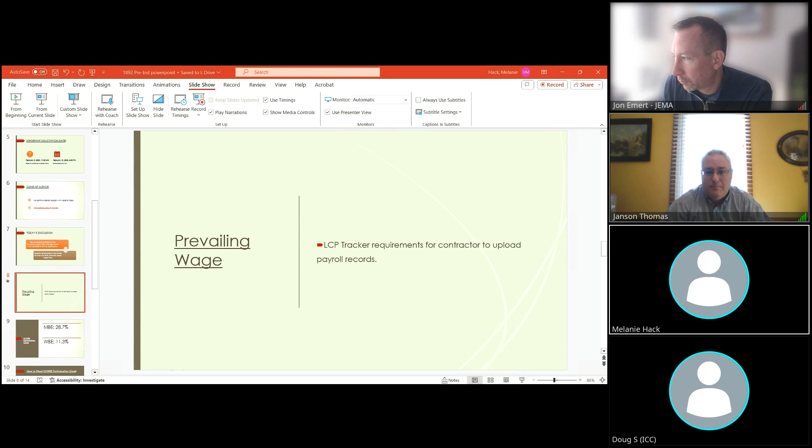Hi, my name is Trinia Russell. I am a contract compliance officer with the St. Louis County MWBE office, and we will be talking about the pre-bid process for the MWBE office. The goal set on this project for MBE is 28.7%, and for WBE is 11.2%. As we discuss the pre-bid process, some of the things I want to point out that are very important is how to meet proper MWBE participation for the project, which ranges from engaging significant numbers of certified MWBEs to making a good faith effort.

So the first thing you want to make sure when you're submitting a bid is that all the contractors, whether they're certified or not, including lower tiers and subcontractors, are listed on the utilization plan. That is the first and most important step. The second step is when you get to the NOIs, notice of intent to hire, make sure they're all included, whether they're certified or not, and signed by the subcontractor. That is very important.

Another thing to keep in mind, here at St. Louis County we use B2G. Just like Janson mentioned he used LCP Tracker at the county, we use B2G. Another thing I really want to emphasize is the NAICS code. The NAICS code must match the type of work submitted on the notice of intent as well as the utilization plan. If it's a certified firm, that firm must be certified with those NAICS codes to be counted for participation. That is also very important.

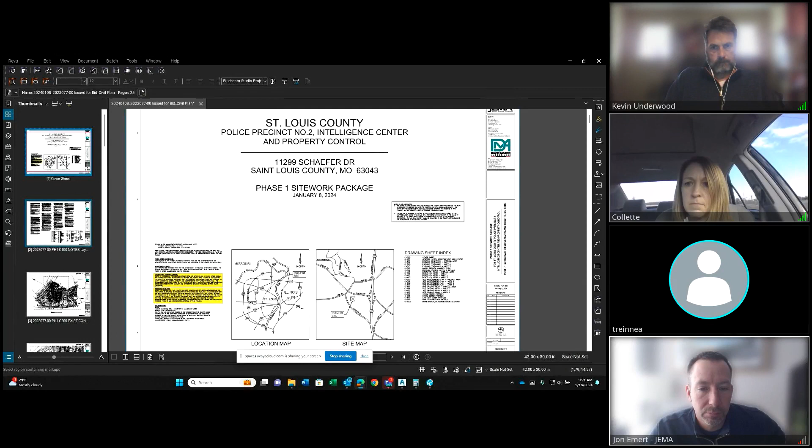So I think we'll hit the high level of what this current scope is for the phase 1 site work by going through the drawings. Can you see my screen all right? Yep, okay.

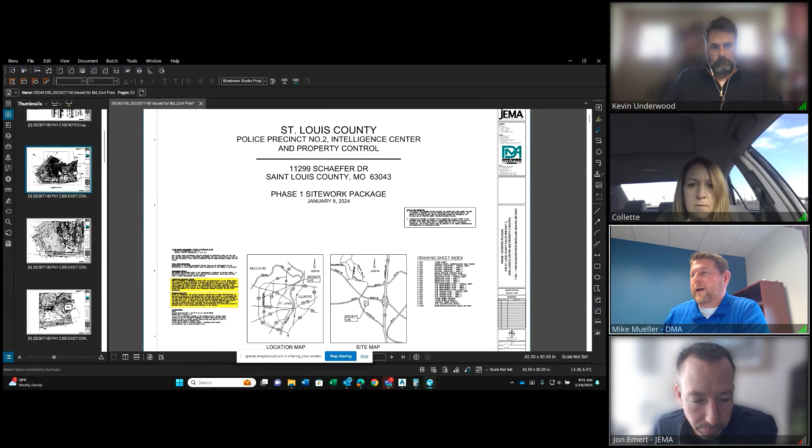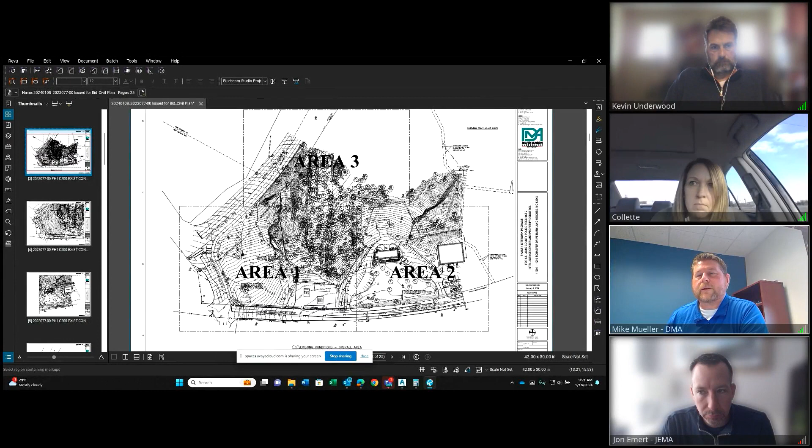Some of the highlights we wanted to point out on the set of plans is, as Colette mentioned, it is a heavily wooded area back here where we're going to be doing a lot of our work. Part of it's in a nice grass area, but there's a lot of tree demolition that's going to have to happen before we can move forward. Some other items back here, which is kind of hard to see on this drawing, I can go to a blow-up drawing in our demo package - there's some storm structures back here as well that are going to need to be removed.

So we got some channels that we're going to be grading out, some storm structures completely being removed, another one here to its endpoint, another one that goes up to the previous drawings. Our limits, we're getting pretty close to Dorsett, aka Schaefer.

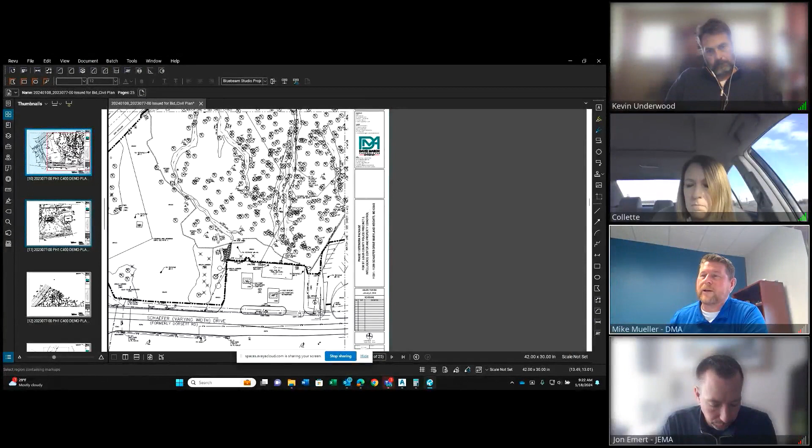We're avoiding the county fueling station altogether. The building next door is the county construction offices. Again, we're avoiding their parking lots. We're skirting their fence here, but our sanitary line does go through that back part of that property.

So there's not as many trees, but anything within our path, obviously we're going to have to clear out. Not huge, but there's a couple stumps just beyond the fence that we're going to go ahead and take out for them as well.

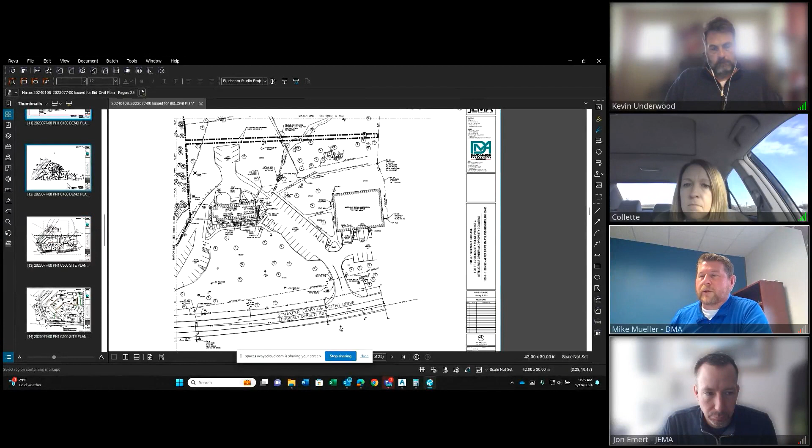Getting into the site design overall, generally the building is facing Schaefer, will be facing Schaefer. So we're going to be grading and installing storm sewers all around the building for future parking. Basin sits to plan north here, and then that sanitary line runs this way here.

Colette had mentioned that some of the structures fall within the future fill. When we get to the grading plan, you'll see a nice huge slope going down towards the building.

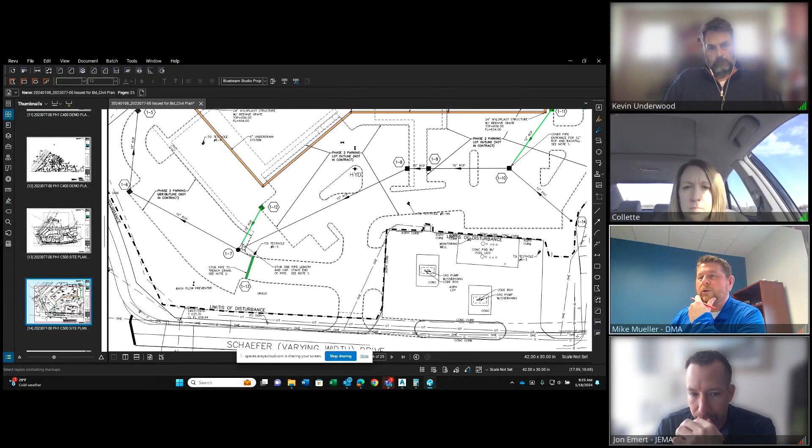So this particular storm run, we have a note to call it to stub out one pipe length and then cap it, stake it so you can find it when you come back after the building has been backfilled. We're also going to hold off on putting any trench drains in because that will just be a huge speed bump during the construction of the building. We don't want those to get destroyed, so they'll have to come back and finish those.

So we'll stub the pipe over to it, but we won't install that one. Additionally, from structure 1-10 to 1-11, you'll have to come back and finish that one after the backfill for the building. And then this entire run was also in the backfill. So these three trench drains will also be done at a later date after the site's been brought up to fill.

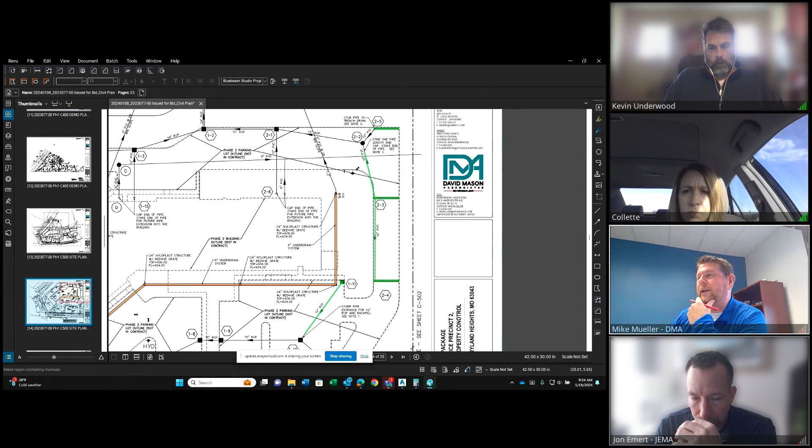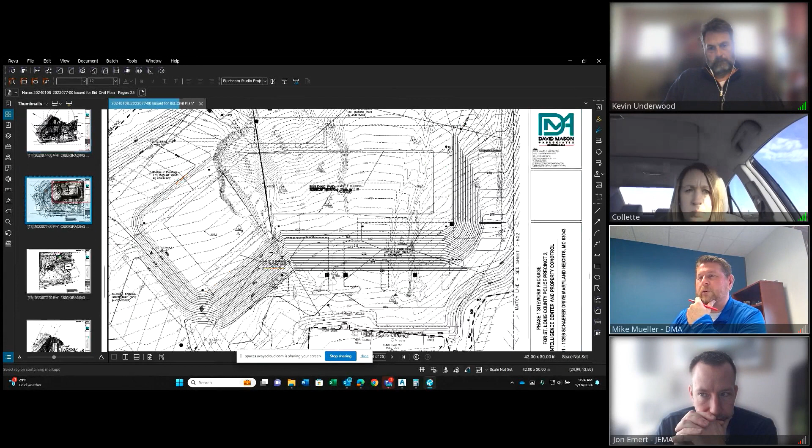I also wanted to highlight the under drain system. I'm going to switch over to the grading plan here. So you can see this huge slope we've got coming down on three sides. It's really directing the whole site runoff from Schaefer towards Dorset. So we think there's going to be a big problem with stormwater during construction.

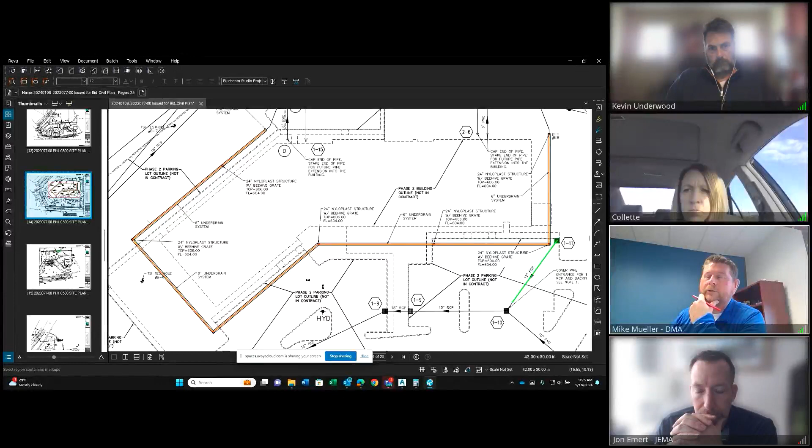So we are going to be installing a 6-inch under drain system on three sides that's highlighted in orange here on my screen. And we're also going to be putting in these Nyloplast structures, 24 inches with a beehive grate to help with the stormwater as well during construction. The phase 2 contractor will be responsible for capping those Nyloplast, but for your construction, we're going to put a beehive grate so we can control the stormwater around the building pad itself.

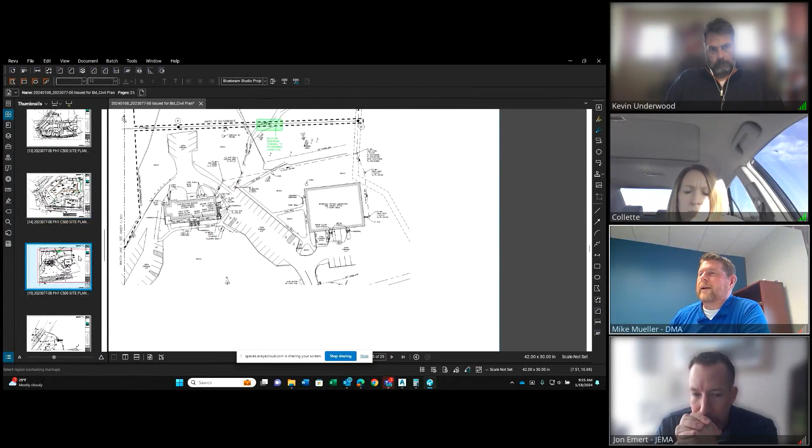So I just want to make sure that was highlighted. On the sanitary line, we're going to address this in an addendum, but there's a drainage way. Just make sure we're restoring the drainage channel to its original condition. We'll add a note and issue that in an addendum. I just want to point that out.

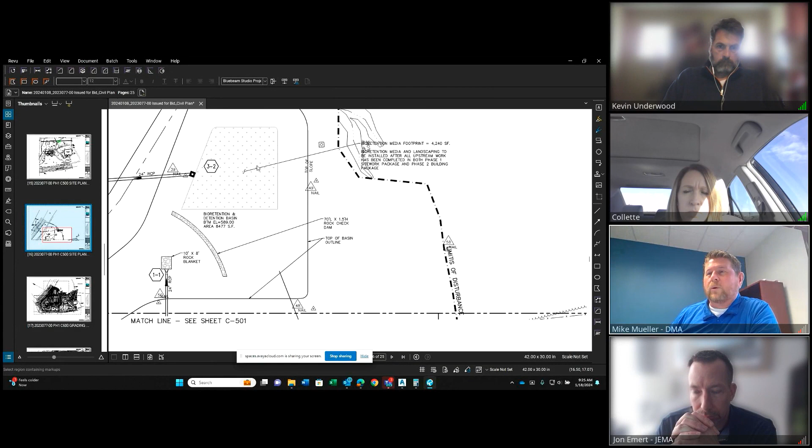This shaded area is the bio basin portion of this nested basin, if you will. This detention basin / channel protection / bioretention basin, all to meet MSD requirements. Only part of the bottom is actually bioretention basin. And that's the area where you have to come back in after everything is secured upstream, so there's no more erosion potential. Dig back down this 4 feet and install the aggregate and sand planting soil layers, and then have it planted at the end of construction.

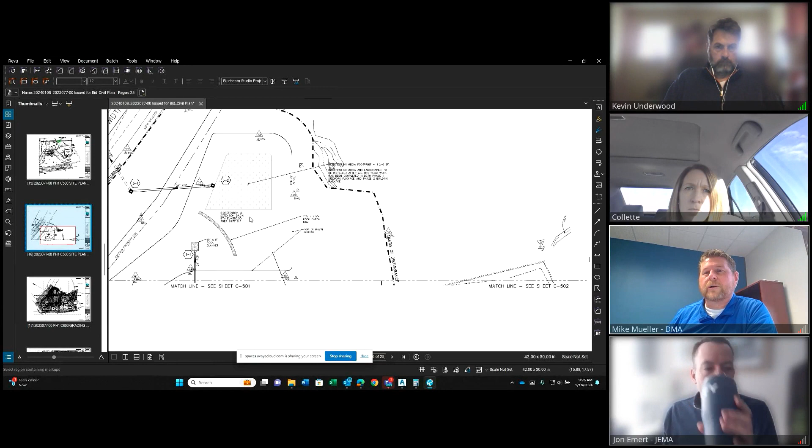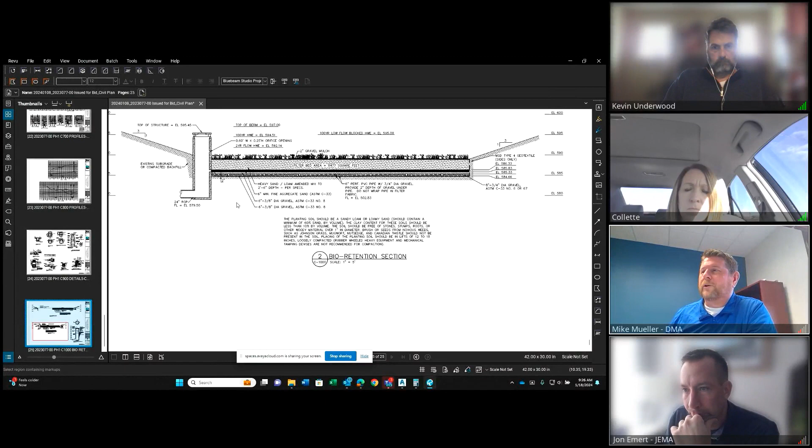There's some sections in the back end of these that kind of show you what that system is made of. So that area will have to, you have to come back in and dig that out. The basin is essentially going to be acting as an erosion control basin until construction is nearly complete. Then you can come back in and coordinate with the building contractor to go in and install that.

Those are the highlights that I wanted to hit on. Let me check my notes. Restore drainage channel, the 2-to-1 slope that we have on here.

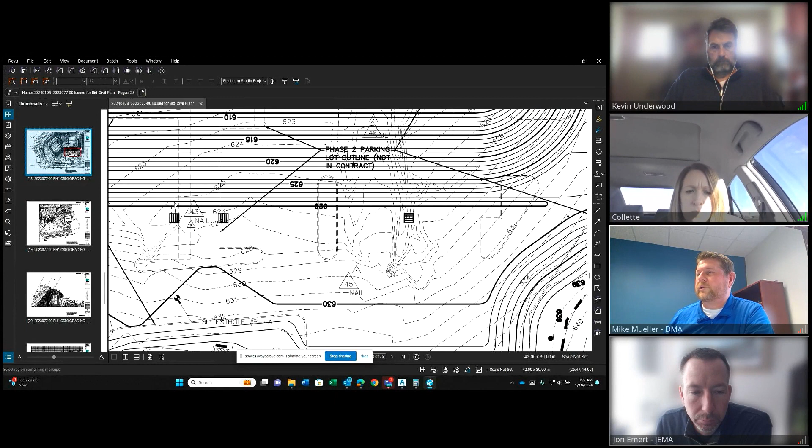We've got called out that the 2-to-1 slope will need to have a plastic sheeting on it to avoid erosion during construction and to anchor it in at the top. So make sure we understand all of that. We do have a slight berm at the top of this to keep water from rolling over the top so that the stormwater can go into these structures during construction. Hopefully we won't have anything going over the top and down the slope to affect the building construction, only what falls on that sheeting, and then it can go down into the beehive grates that we have designed.

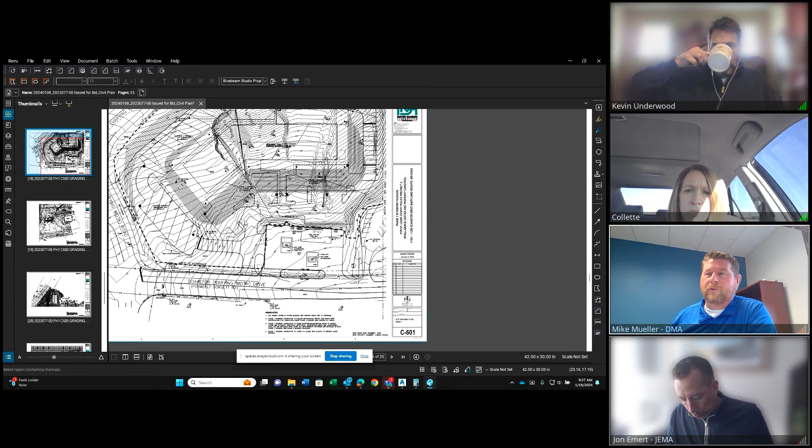Just make sure we're doing temporary seeding in all areas when you're complete. Also note that in the building and parking lot and paved areas, where we're coming up to grade, we've designed this to be 1 foot below finished grade so the building contractor will come in and do the parking lot. In all those areas, compaction needs to be per the geotechnical report and specifications for under pavement.

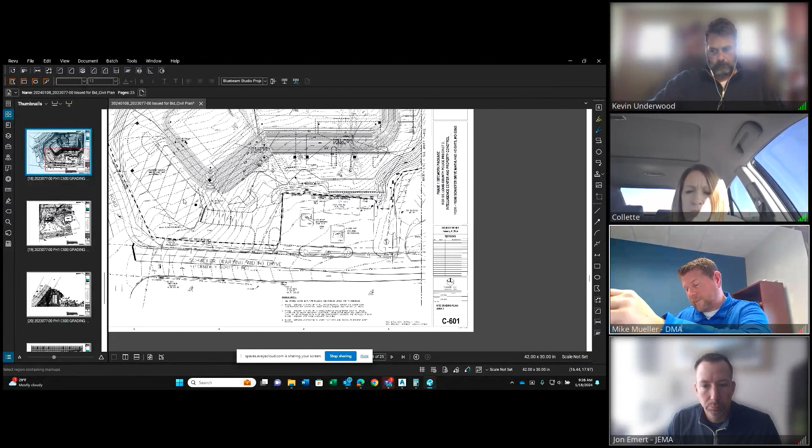And to the 95% standard Proctor for building areas. I believe that's everything I wanted to cover. If there are any questions, I'd be happy to answer them.

Quick question for you: is this intended to be a bit of an export here, or is it close to balanced? We haven't run through everything quite yet, I was just curious what your initial take was on it.

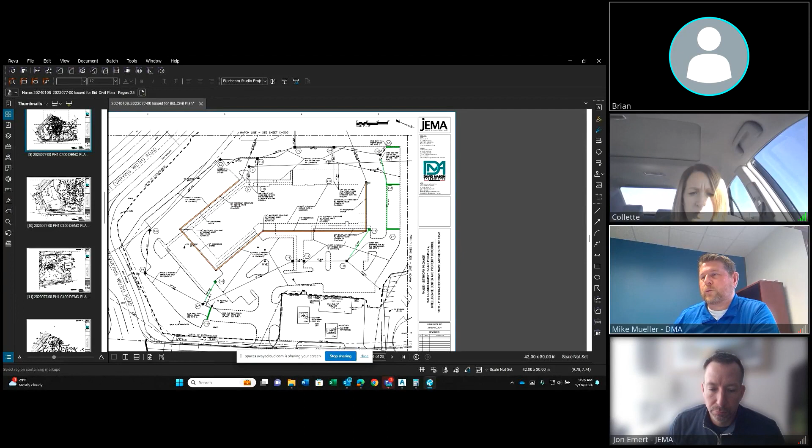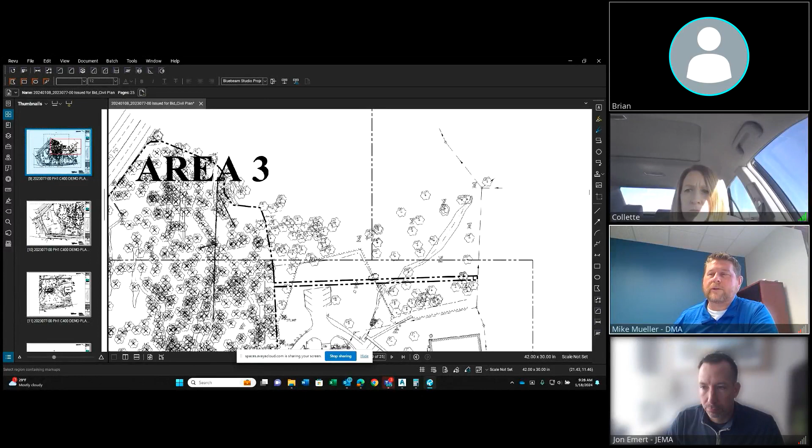I'm glad you brought that up. We're going to be a balanced site. When we're doing our clearing, I'll get up to the overall demo plan, we're clearing up to this line. This area right here we're clearing so we can stockpile excess cut in phase 1 and use it to backfill in phase 2. So we've got an area identified for stockpiling.

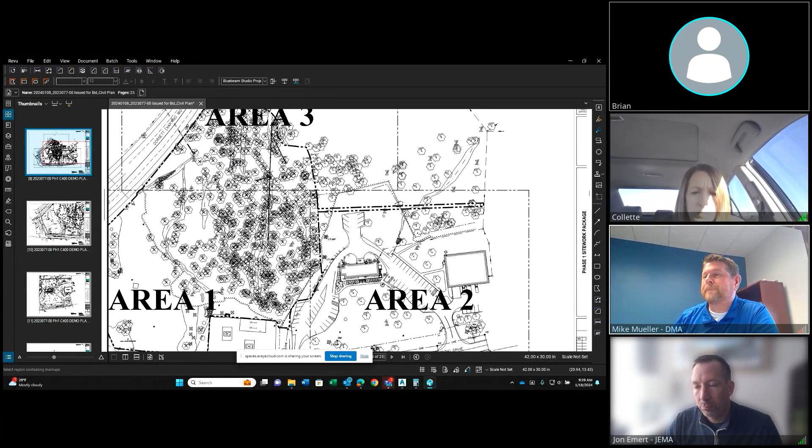When stockpiling, our erosion control plan always shows the initial erosion control because it's an active site. As a site develops, you might need to move your silt fences or inlet controls. But when you put the stockpile, you'll need to temporarily seed it and make sure you put erosion control, a silt fence, around it so we're not having erosion going off our disturbed area. So your portion, phase 1, will have excess cut that will stockpile on site for use in phase 2.

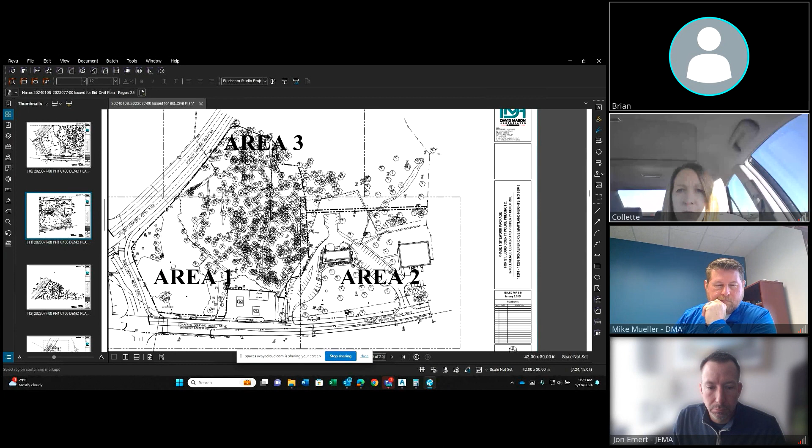Okay, great, thank you. If there's nothing else on the particular drawings or scope, we can switch back to the slideshow.

So there are liquidated damages on this project, and they're on a few different milestones and requirements. There's liquidated damages associated with submittals. From the date the contract is executed, you have 45 calendar days to get your submittals in. This is just an intermediate milestone to help keep the whole project on task.

There's also liquidated damages associated with uploading all of your first tier subcontracts into B2G. Trinia talked about B2G and how that's used for tracking the MWBE. It's very important for them to see those subcontracts to verify what folks are getting paid or going to get paid. So all of those need to be uploaded into B2G within 30 days of contract execution. On previous projects, they had to be uploaded before you could start. So this is giving a little leeway to make sure you can still get started while working out your subcontracts. But if it goes more than 30 days, that's a problem, and we would start incurring liquidated damages.

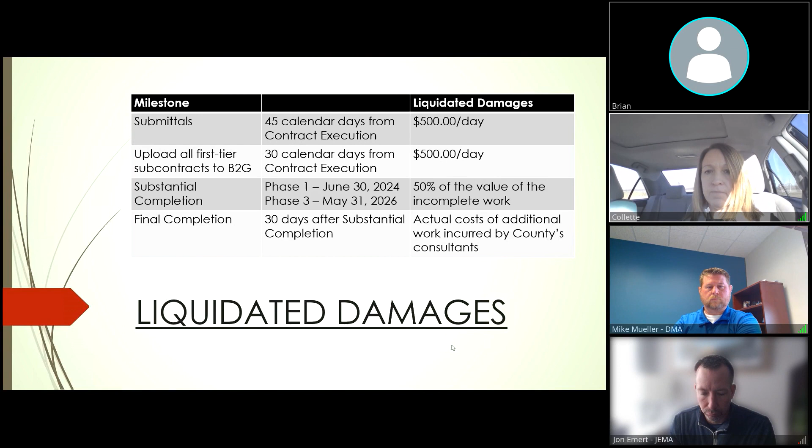Any questions on liquidated damages? Okay, we can go on to the next slide.

Thanks, Melanie. So some site requirements, as typical, provide your own restrooms. We do ask that you have a temporary trailer, and I understand sometimes in the site work phase you don't always have a trailer out there yet, but we need it for a touchdown space and a place to hold our meetings for those first few months. You can demobilize that trailer at the end of your phase 1, but we do need that out there, and the bid package goes more into description of how much space that needs to be and so forth.

I believe on the civil plans, or it might be on the site logistics plan, you'll also see that before you wrap up phase one, you need to go ahead and put in a temporary road around the building in place for the general contractor.

We're also asking, because you're the first people on site, we want to start advertising the project. In your scope, you will be providing a project sign, and there's a description of it in the bid package. The design team will help us design that, but then you would take it from there to get it fabricated.

Mike talked a little bit about SWPPP and erosion control. You will be responsible for that because it's a permit that has a contractor's name on it, so you will be that contractor. You'll set up SWPPP at the beginning of phase one and adjust it as necessary, as Mike described. When you leave, it has to still be in place through phase two, so you may be coming out through phase two to do some periodic maintenance of it, and then to remove it when the time is right.